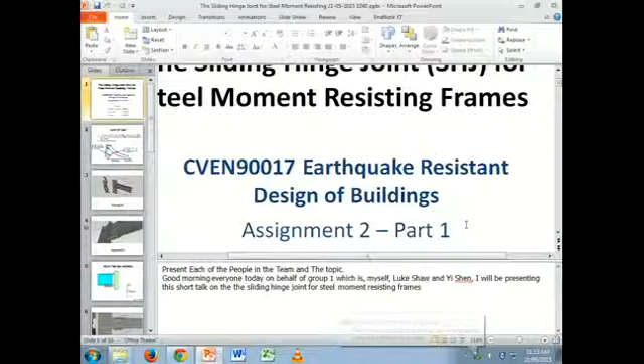We're group one. Okay, so we are going to be boring and just go through in order.

Good morning, everyone. My name is Cameron Stewart, and I'm representing Group 1, which is presenting the sliding hinge joint for steel moment-resisting frames. Group 1 is myself, Luke Shaw, and Yi Shen in the audience there.

First of all, the aim of the sliding hinge joint is to provide a joint that has two different types of behaviors depending on the seismic demand on the structure. You can see here in the ADRS diagram, up to the design level earthquake, the structure is designed to behave rigidly, so for a service level event or wind loading and stuff like that, the structure remains rigid.

Once we exceed the design level event, the joint's designed to behave flexibly, allowing the structure to displace without an increase in the moments and forces induced in the structure. So here's the joint.

The dimensions that we show here are based on experiments in the literature. That's where we got the section sizes from, the bolt numbers, the plates, and stuff like that. So this view shows the assembly of the joint from below.

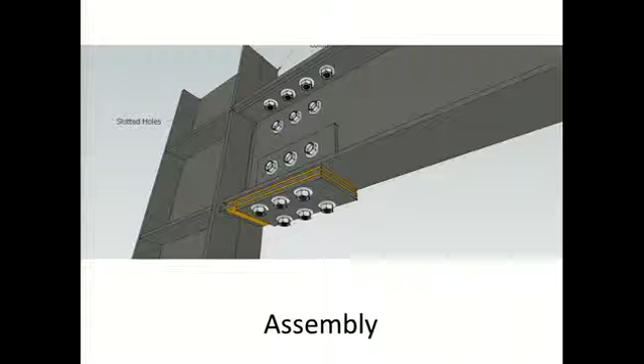Going back, the bolts installed here are installed friction tight, so they're tensioned up to provide a clamping force on these plates here, and that's what creates the friction at the base of the joint, which basically determines the rotational stiffness of the joint. You can change the tension, number of bolts, the interface materials to vary the friction force that the joint needs to overcome to rotate.

Moving a bit further, taking away the beam, you can see that the joint's quite simple. It's only 3 plates with elongated holes, excluding the other parts of the mechanism, which makes it quite cost effective, because fabricating this as opposed to fabricating a normal moment resisting frame joint is pretty much the same amount of work, so it's favourable in that regard.

This animation shows how the joint deforms and develops the hysteresis. Rotations occur primarily around the top flange plate here. As rotation occurs, we overcome the friction force that's being resisted in that bottom sandwich of plates, and that's what allows the hysteresis to develop in this form over here.

You can see that we are developing some moment, and then we're sliding, so no degradation in strength, but just additional displacement, and then again where the second sliding occurs. These two surfaces may actually be much closer together.

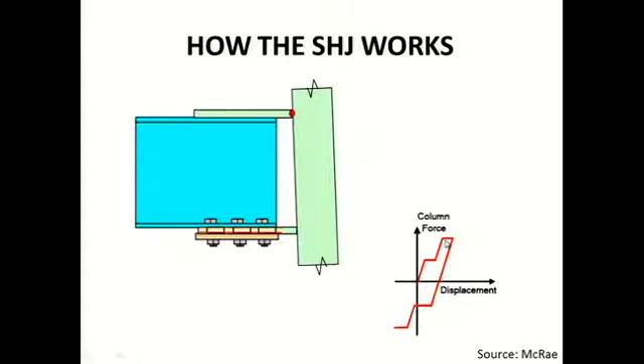As the load's reversed, you can see that the behaviour is the same in the reverse direction as well. And you also note that we've got a rhombus-shaped hysteresis, which is typical of a friction slider dissipation mechanism.

Okay, some advantages and disadvantages of the joints that we found in the research, noted in preparation for this presentation.

An advantage, which is one of the main aims of the joint, is to decouple the frame strength and stiffness, so the two things are independent.

The next one is the lower principal structural cost. Because the joint is rotating before that moment is developed, compared to a typical moment resisting frame, the section does not need to resist such high moments, so the sections can be reduced, and that cost saving can be passed on into the actual joint itself or other damage resisting technologies in the building.

Another advantage of this joint over some other low damage technologies is the inelastic demand is confined within the bolts. Some other technologies may have a fuse or something meant to yield and be replaced post-earthquake. In the case of this joint, that's the bolts, which are a relatively low unit cost item and a lot less difficult to replace than maybe a member or some other component.

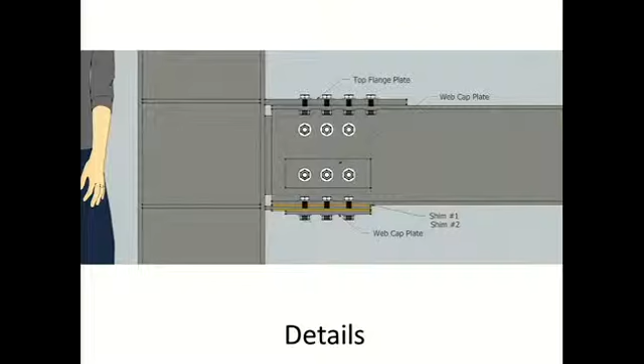Another advantage of this joint, as opposed to a normal moment-resisting frame, as I said before, is the rotation is principally around the top flange. That means the strains induced in the slab are minimal, as opposed to a moment-resisting frame, which would have much higher strains in the concrete, cracks in the concrete, damaging the slab, which obviously increases the cost of rectification works.

Just onto some of the disadvantages. One of the disadvantages highlighted in the literature is the residual drifts. As it's a sliding mechanism, the load may decrease when the building's drifted, and the friction will prevent the building from correcting itself. That's one of the issues there, but that's typical with friction sliding mechanisms.

Another disadvantage is low and varied residual joint strength. As the joint deforms, the bolts have moment, axial, and shear forces in them, and that deforms the bolts and results in a loss of tension within them, which reduces the friction between the plates, so the stiffness of the joint post design level event is not the same as it was in the service level event condition.

Another disadvantage listed in the literature, due to the limit of research, is that up to date the design of this joint is only considered in a one-way moment-resisting frame.

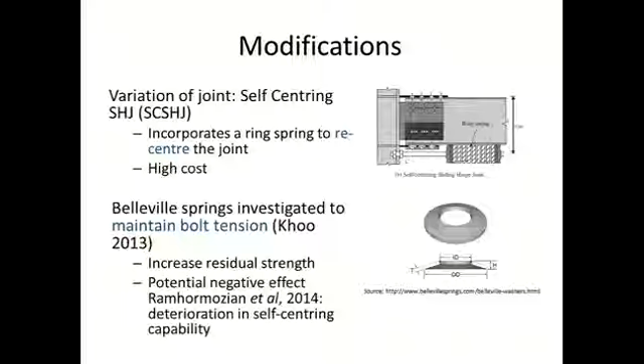So in conclusion, recommendations: based on our limited research leading up to this presentation, we found there were a number of questions regarding the joint, a few that I wasn't able to list due to the time limits we've got here. But we think there needs to be a lot more investigation to really nail down some of those issues before it's implemented more widely in moment-resisting frames.

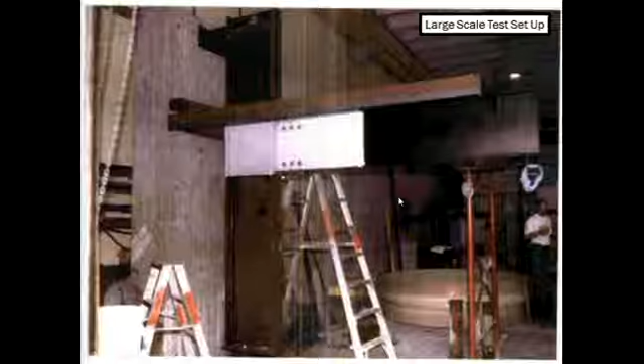This will be a very brief summary because the document related to this is over 100 pages long and I only just skimmed it. As part of Clifton's research, he performed 4 large-scale tests. You can see this very quality picture here that I managed to source from his PhD scan, where he mocked up 4 large-scale real-life tests to nut out the design procedure quirks and the things he really had to take into account in forming this.

This is just a picture of the large-scale test that was performed. You can see the slab, the other side of the hinge here, and this is the instrumentation used in actually going through the analysis of the sliding hinge joint. You can see the sliding hinge mechanism at the top and bottom here. This is instrumentation used to record the data, and you can see this is a stiffened column, because you do usually want a stiff column when dealing with this kind of stuff.

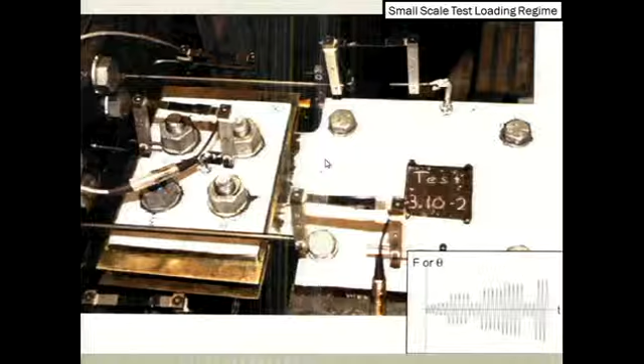There was also small-scale dynamic and static testing, part of this where they had force rotations applied over a time scale just to really get the nitty-gritty details out on individual bolt performance, as part of making sure that what he was proposing wasn't going to kill people if implemented in real life.

These are the sequence of design actions that came about as a result of all of this research, proposed as part of his PhD. There's 14 steps in the basic design of a sliding hinge joint. I guess this would be the key bit of research towards implementation of the sliding hinge joint — being actually able to design this stuff in real life. My inner bogan slips out for a minute there.

The next bit of research is the effect of the shim material. As you also saw on Cam's slide, the plate of material that actually forms the frictional surface — the primary mechanism by way of energy dissipation through the surface — is called the shim. In Clifton's initial research, the first instance of this technology, he used brass.

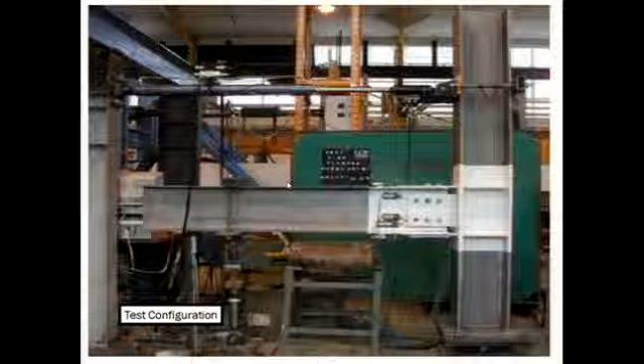But brass isn't always the most cost-effective choice to use — it can be a bit expensive relative to other materials such as steel. So what was done by MacRae and others is they tested out the shim material based on a real-life situation, a full-scale simulation of a sliding hinge joint in real life.

You can see it all happening around here. So what they did is they used different shims in this little section. They tested brass, steel, and aluminium to see which one would perform better. Because if steel works better, that's fantastic, or if steel works along the same lines as brass, that means it's cheaper and has similar corrosive behaviour to the rest of your frame. It really works out nicely.

So they ran these tests and got some test results out of here. This is just a closer view of the test configuration that was performed.

So they got their test results, and what they found is that the mild steel they tested had behaviour congruent to brass. The benefit of that towards the actual implementation of the research is that steel has its own intrinsic benefits. Its cost is a lot cheaper than brass, it's more available, and it's easier to install, as well as having similar corrosive behaviour to its surrounding parts. So if you've got your beam and column all steel, and you have a steel shim in there, it's going to have similar corrosive behaviour, which is really nice when you're doing your corrosive analysis.

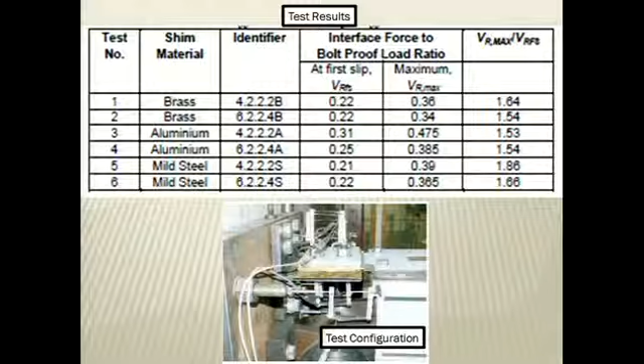Aluminium, whilst having a greater initial frictional resistance, over time as it slid actually lost that frictional resistance. So that was an issue with using aluminium, and why they decided not to go with it for real-life applications. This next bit is just a column hysteresis that was formed as a result of this.

So the testing for this was based on a real-life application of the technology. This is actually a mock-up of Te Puni Village, the student accommodation buildings, which I'll get to in a minute. So this is based on a real-life scenario, just to see if they can improve the behaviour of something equivalent to this real-life application.

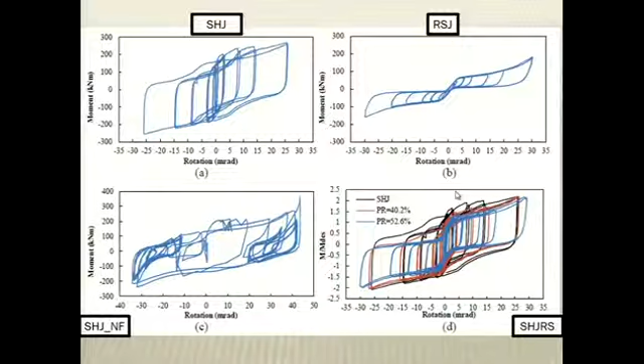Moving on to the actual real-life applications of this technology is the Bellagio apartment building. This is the first implementation of this sliding hinge joint in real life. They used 200 in the construction of this building in the one-way frame. There's not too much documentation regarding it, so I couldn't get any open plan views of this.

So this is more or less a casebook study. This is just the SHJ detailing regarding this - a textbook case study. There hasn't really been too much beyond it because they are still working out the nitty-gritty details of how to apply this in a wider range of scenarios.

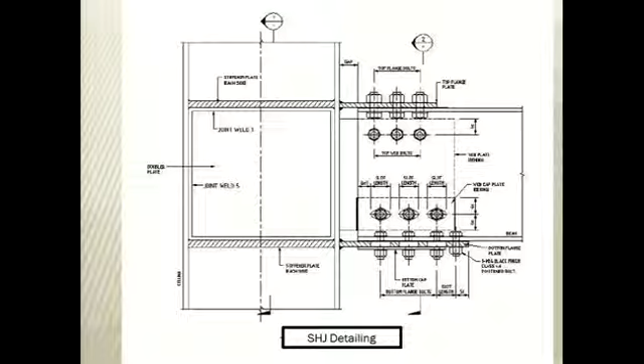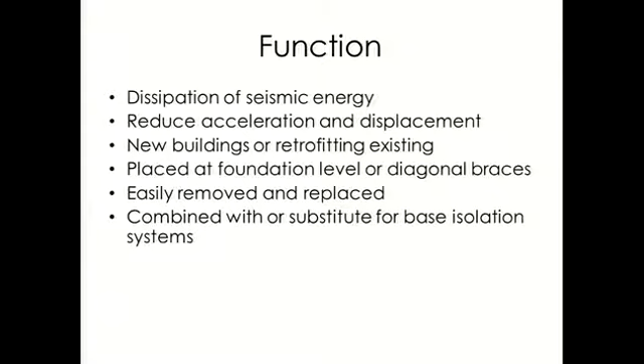Especially with tall buildings where you can't do base isolation, these can act as a substitute. There are 3 broad categories I want to look at today, but the main aim of all 3 is basically to convert earthquake energy into heat.

The first kind is a viscous damper, which is basically just movement of a fluid within a cylinder. It's a cylinder with a viscous fluid in it, with a piston that has some holes in it. So when a force is applied, the viscous fluid can push through the piston and slow it down.

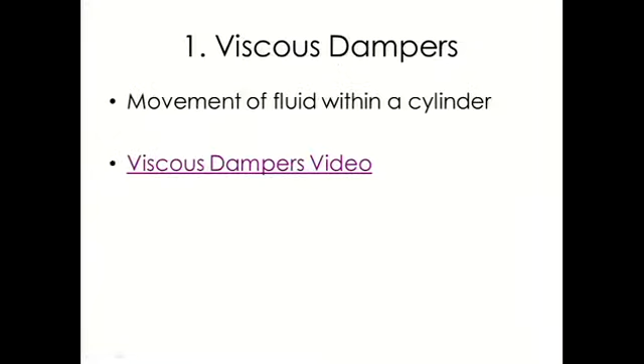The advantages of the viscous damper are that they significantly decrease structural response, and they have better performance in reducing base shear than some of the other technologies I'm going to look at. The disadvantages are that it's pretty expensive and sensitive to temperature. The last one is that the resisting force depends on the velocity - if the peak structural response occurs early in an excitation, the velocity won't be high enough for the damper to actually work effectively, because damping is dependent upon velocity.

The second type I'm looking at is friction dampers. This is literally just 2 bolted metal surfaces rubbing together, so the friction between them is effectively what creates the damping. It's used in a wide variety of different types of structures: low damage steel, timber structures, resisting frames, and diagonal braces. I got another quick video of how it works.

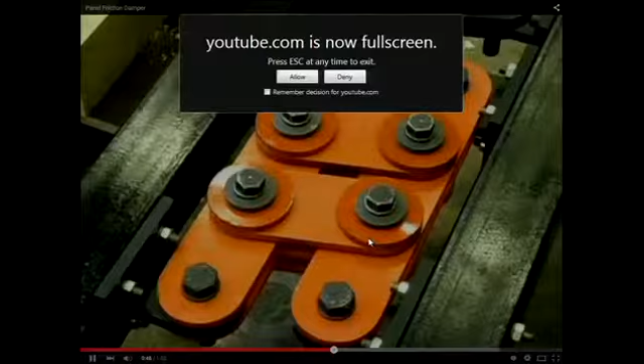It's pretty cool - it's literally just a bunch of metal plates bolted together. So as a lateral force is applied, these metal plates, the friction just causes the damping.

The advantages are that it's reliable and insensitive to temperature as well. It's simple, foolproof construction - as you just saw, you could just bolt 2 metal plates together. For that reason, it's not expensive, and it doesn't require repair or replacement after an earthquake.

The disadvantages are durability concerns - obviously you've got two bits of metal rubbing together, so over time that causes issues like wear and tear. For that reason, it's only recommended for dry internal use, but I'm pretty sure I read in the readings that in New Zealand they're trying to get it to work everywhere, so I don't know. It's only used to prevent elastic deformation at the moment as well.

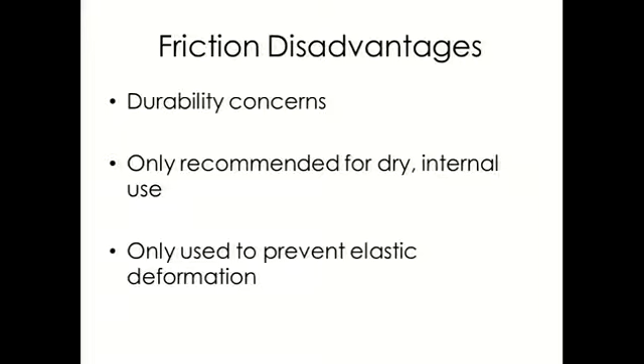The third type is the yielding damper. This is basically just a bit of steel acting as a diagonal brace, which is designed to yield and plastically deform if an earthquake were to occur. The main type is a buckling restrained brace, which is basically an encased steel core, and the case is there to prevent buckling. I've got a picture of it here.

It's literally just this steel core that could replace a diagonal brace in a building, and it's encased, and basically if an earthquake hits, it's designed to yield.

The advantages are that it can be put on new buildings or retrofitted because it's literally just a bit of steel. These are suitable for inelastic deformation, unlike the other ones I talked about, and it's got long-term reliability and insensitivity to temperature as well.

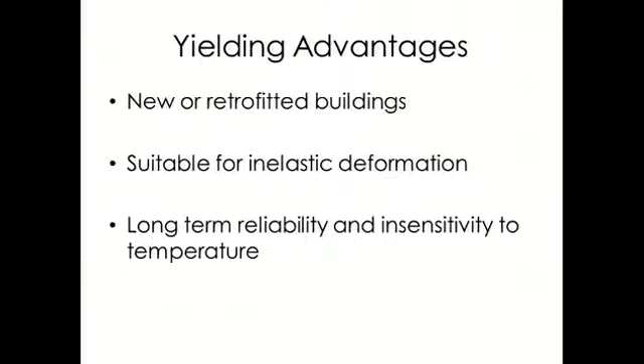The disadvantages are that it has to be replaced after a disturbance because you're plastically deforming it. It may fracture prematurely due to frequent wind loading - that was pretty interesting, so if a building was just being hit regularly by frequent strong wind, it could sort of activate the deformation of these. So they require regular inspection. The last one is that it's not optimal yet due to its strong nonlinear behavior, but I'm pretty sure there are works going on to fix that at the moment.

That's all. Thank you.

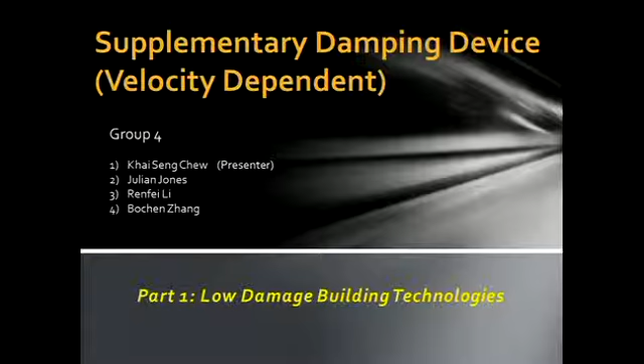Today I'll be giving you 3 examples of buildings which use supplementary damping devices. Before I begin, I'd like to give an overview of what I'll be presenting, starting with a rough idea of where these buildings are before going into detail.

We have 2 buildings located in California: the Arrowhead Regional Medical Center and the Hotel Woodland. Both are located near the San Andreas Fault, which runs for about 1,000 kilometers. Our third building is located in the Philippines, the St. Francis Shangri-La Place, a high-rise residential area also located near a fault zone.

The first building is the Arrowhead Regional Medical Center. It consists of 6 interconnected buildings, 8 kilometers from the San Andreas Fault. Because of its location, it experiences a site transient velocity of 1.5 meters per second. Originally these buildings were designed on base isolation bearings, but the technology at that time could not meet the deflection requirement for such a site transient movement of 1.5 meters.

So they needed something implemented into the current design. What they did was implement what was called the viscous damping device, installed horizontally, connecting the foundation of the building to either a truss or a column. By installing this, they were able to reduce the displacement requirement of the bearings to only 0.6.

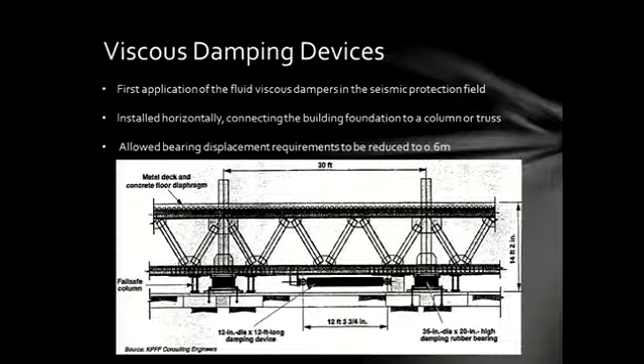Our second building is the Hotel Woodland in California, a 4-story building. The ground floor is used for commercial purposes and the others for residential. It's also worth noting that it is a historical landmark, so when coming up with a design to improve its seismic resistance, they had to cater for designs which do not affect its appearance. It's located in an area of high seismicity near the San Andreas Fault; the largest earthquake to influence the site was of a Richter magnitude scale of 6.75.

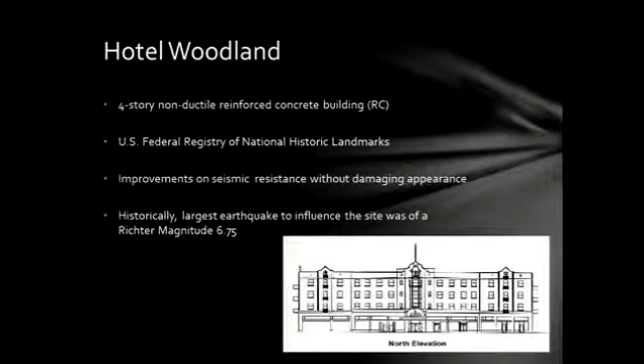What they came up with is a design using a steel moment frame with fluid viscous dampers attached on top. Why this design? The main reason is that compared to other designs like shear walls, it does not affect the appearance of the building. Secondly, it's easy to retrofit this device into the building without causing interference to residents staying there. Another main reason is that it's able to dissipate large seismic energy into heat and reduce inter-story drift, and it was a very reliable device because it was previously used for military applications before being brought into structural application for seismic resistance.

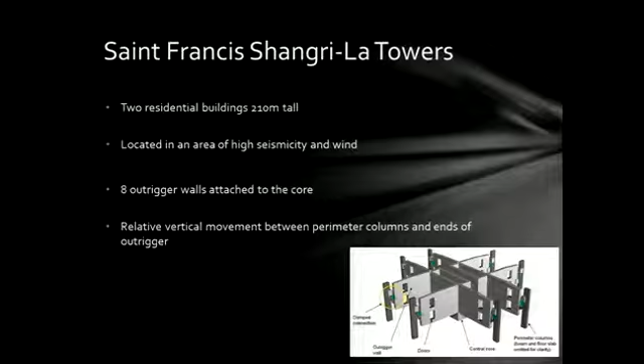Our final example is in the Philippines. It consists of 2 towers, a residential building about 210 meters tall, located in an area of high winds and seismicity. Its structure consists of 8 outrigger walls connected to the cores. Because of lateral movement, this induces relative vertical movement in the outrigger and the perimeter column, as you can see from the picture. They needed to reduce this displacement or any vertical deflection between these structures.

So they implemented, again, the viscous damper. You'll notice all of the examples I have are buildings which use viscous dampers because these dampers are velocity dependent. The reason they use these dampers for this building is because it takes less space and is placed away from the top of the building, which for a high-rise structure is the most valuable space. It can also be used over a whole range of amplitudes.

Here's a clearer picture of the damping device. As you can see, it's connected to the perimeter column and the outrigger walls.

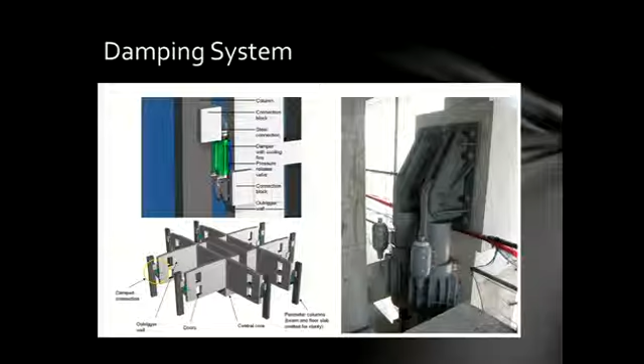I'd like to conclude by giving the reasons why these devices are used in buildings. First, it is very reliable given its track record in military applications. It is also cost-effective for some buildings because it can be easily installed and retrofitted. And it takes up less space, but most importantly, it's able to dissipate a large amount of seismic energy. That's the end of my presentation.

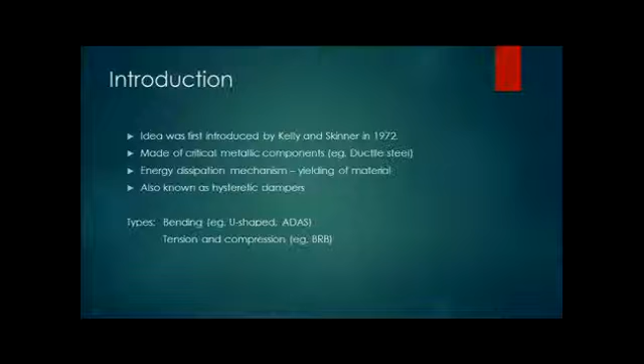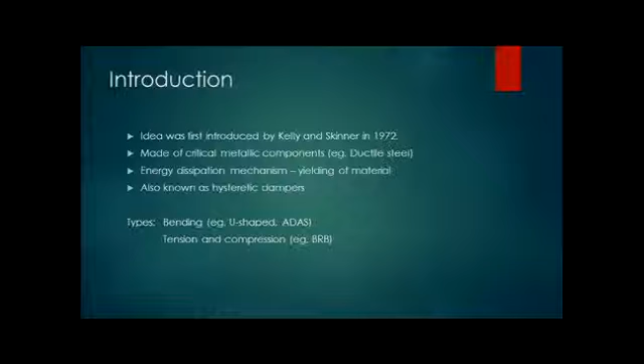As the name suggests, it dissipates energy through yielding of a metal. It's also known as a hysteretic damper because of the nature in which it dampens out the energy. There are two broad classes of metallic dampers: one caused by flexural deformation, where the metal yields through bending, and the other through tension and compression, where the metal yields through tension or compression.

Since a certain part has already yielded, the next time the cycle continues, it goes up and then down, forming a hysteretic damping behavior. An important point is that the yielding is spread over the entire length of the component, so the danger of low cycle fatigue is limited because the strain is spread over the entire component.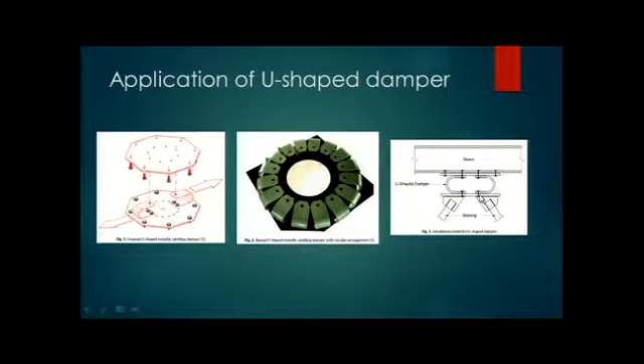This one Alex has already introduced - it's the buckling restrained bracing. It's obviously a bracing, and the way they restrain it from buckling is by introducing a steel jacket. So this is your steel core inside, with a steel jacket on the outside, and then a core.

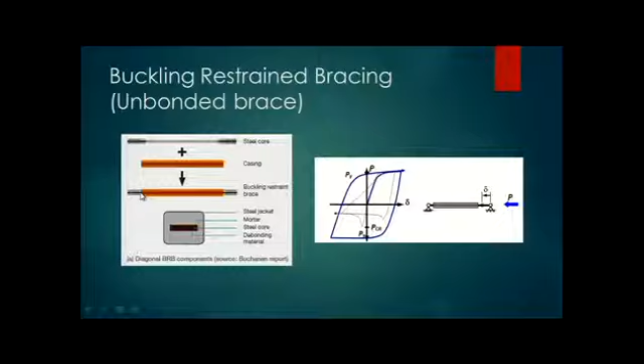Again, in this case, low cycle fatigue is not that much of a concern because the strains are spread along the entire length of the bracing.

Advantages of these dampers: stable hysteretic behavior which is predictable, good for tall buildings because you can retrofit along the entire length of the building. The good thing is it reduces interstory drift along the entire height of the building, so it's not a concentrated damping device like base isolation or tuned mass dampers located at one end. It progressively dampens the energy out.

Also, it has long-term reliability. It's just a material you're putting into a structure. It's insensitive to ambient temperature, and we're using ductile steel, something engineers are already familiar with. Even after it has yielded, it doesn't affect the gravity resistance system as much.

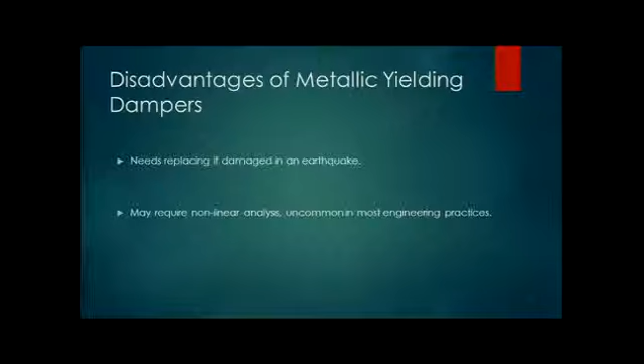The disadvantages are that after an earthquake it has yielded, so it needs to be replaced. You need your procurement system in place to get this done before the next aftershock or whenever the next earthquake is. And since it's yielding, it's non-linear behavior, so to know the exact behavior of your building you'd need to conduct non-linear analysis, which isn't very common in practice.

And that's it. Thank you very much.

Morning, fellow classmates. I'm about to deliver a short presentation on the applications of metallic yielding dampers in structures.

Our first example is the Izazaga building in Mexico City, Mexico. This structure was built in 1970, before they had any idea of how to provide seismic restrictions to a building. It's 12 stories high, reinforced concrete moment frame construction, with a floor area of about 1,200 square metres.

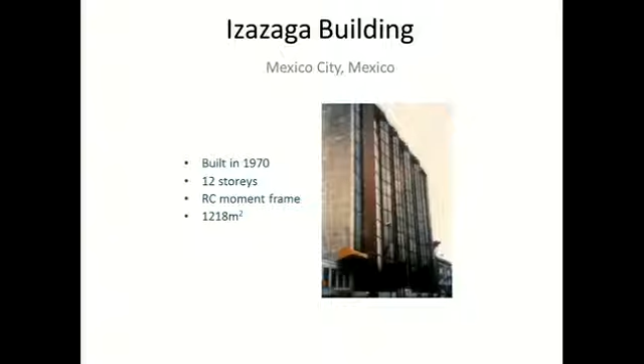What they did to repair the damage immediately was implement small interior columns. This was a quick fix type thing, and it didn't really work, because in 1986, when another earthquake hit, it got damaged even more, and where there were brick infills in some of the frames, those began to crack, so the building wasn't in great shape.

At this stage they decided to do a feasibility study into introducing ADAS dampers into the system. This was done in accordance with the 1987 Mexico City Building Code. After extensive analysis using time history, with earthquakes synthetically made using the standard building codes for Mexico City, the dampers were put in, in 1990.

On the right there's an image of the west wall showing the arrangement of the dampers within the frames up the height of the building. In the lower floors, where the force is sometimes larger, there are two dampers placed concentrically on the beam above, whereas in the upper floors there's just a single damper placed eccentrically in the beam.

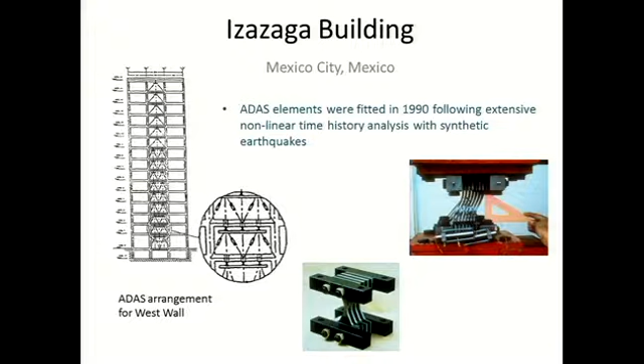The result of this implementation was that the interstory drift was reduced by 40% and the fundamental period by 20%. By decreasing the period, you actually increase the accelerations in the building, but this was offset by the fact that the stiffness of the building is increased by the addition of these dampers.

The main issue with implementing a new seismic retrofit for this building was that it had to be done without disrupting all the occupants of the building so that they could get on with their lives.

So they thought the ADAS is a simple solution which you can just put in with the existing brace system around the building. They placed the ADAS dampers on the perimeter of the building because this also provides additional torsional restraint, which is quite damaging in earthquakes. The further the ADAS damper is placed from the centre of stiffness, the more torsional resistance you get. That is why they did that.

So we're going to stay within the same continent now and go to the USA, looking at the Wallace F. Bennett Federal Building in Salt Lake City.

This one was built in 1960, also previous to a lot of the seismic knowledge that we're privy to now. It's a smaller structure in terms of height, only 8 stories, also a reinforced concrete moment frame, but with a larger floor area, approximately 27,000 square metres.

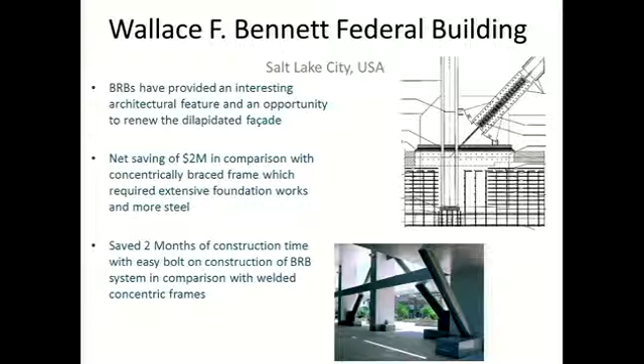It also greatly improved the facade of the building, which was a very bland concrete facade, with interesting architectural aspects happening in the main foyer. This is an inspirational photo of the before and after shot.

It hasn't really changed that much apart from the colour - it's still a bit of a concrete jungle and monstrosity, but now performs much better seismically.

So these are the references. I don't have any recommended readings like Helen has, but you can find them for yourself. Thanks for listening.

We're talking about the passive damping provided by shape memory alloy today. I realized nobody has given any background information, so I'll talk about this briefly. This low damage building technology is a new technology that has recently appeared. It's a bunch of technologies developed independently over the past few years, but this concept as a whole didn't appear until very recently.

Traditionally, when people talk about earthquake resistance, we think about how to build the building stronger. We want larger elements, a higher grade of concrete, but increasing this building standard also increases our cost. So people are thinking from the other end: how about we just decrease the damage of the building itself? So here comes our new concept of low damage building technology.

This is to restrain the damage level of a building, or limit it to some secondary elements, at a given design seismic grade. In order to achieve this target, we need to consider more about the flexibility and ductility of the building, and also focus on level of safety, stringent performance, and economic consideration, of course.

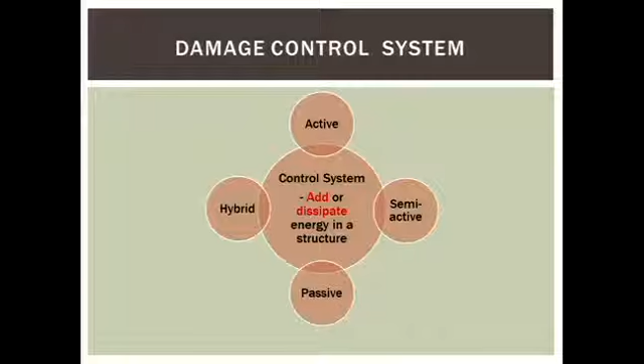For this damage control system, the mechanism is to add or dissipate energy into a structure during an earthquake. If we want to add energy into the system, it's called an active system. If we just want to dissipate the energy from the earthquake, it's passive. There's also something between them, combining these two methods together.

Base isolation system was developed about 80 years ago. It is one of the most widely used technologies of a passive system. This technology isolates the superstructure of a building from the ground so that we could increase the period of the structure, and also dissipate energy because of the deformation of the support itself.

It's like a pile of slices which could slide between each other during an earthquake, allowing for deformation while the energy is absorbed. There's also another new kind of sliding bearing that does not have a rubber part; it just slides to decrease the friction between contact surfaces.

The advantage of such a system is very apparent because it's a passive system, so it requires no external input of energy, which is quite economical.

But because most of them are rubber-based, this material could experience aging under pressure and when exposed to external weather. So it has a very big problem with durability, and under a major earthquake it could just get damaged. So after a major earthquake we have to replace it, which will be a very big problem because you cannot just remove this whole building to the side, replace the support, and then put it back.

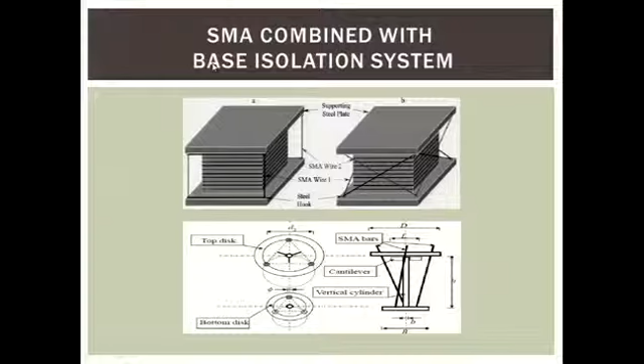This is an innovative system where we get rid of the rubber part totally. This is the aluminum disc on the top and base, and in the middle it's a steel rod. We have 3 of these SMA rods placed at 120 degrees, so they have an even distribution of this constraint force. With this, we don't have to worry about the aging of the rubber material anymore, and we have better use of the deformation capacity of the SMA material.

To solve that problem, it is not often used in isolation. The shape memory alloy is often used as a supplement to an already working system. Another problem is the temperature sensitivity of this material, because as we talked about before, when the temperature changes, the material will endure a phase change. That is why it is not suitable for countries with very low temperatures around 0 degrees.

To solve that problem, we can induce a current within this material so we could heat it up to its optimal temperature. But this will also induce another extra cost for the whole system, so we just go back to the cost problem again.

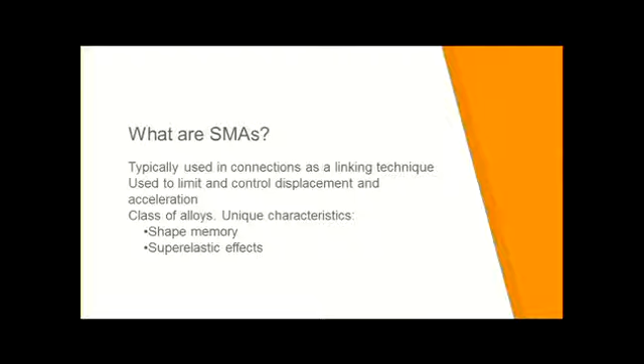Martensite is formed upon loading beyond a certain stress level, which results in that stress plateau as we saw. Upon unloading, the martensite becomes unstable, resulting in transformation back to austenite and recovery of the original undeformed shape.

We primarily looked at some practical examples of these devices. The first I'd like to present is the Basilica of St. Francis of Assisi in Italy. After a 6.1 Richter magnitude earthquake on the 26th of September 1997, large cracks appeared on what was called a tympanum, a structure near the roof at the front of the basilica.

Rectification work included restoring the tympanum using stones from the original quarry, and also installing a connecting device between the roof and the tympanum. This truss was connected using a series of shape memory alloy devices, spaced 50 centimetres apart, so it's actually hidden.

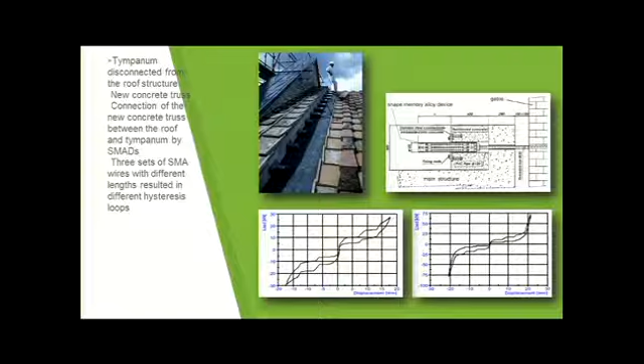So this is the tympanum here, and this is the roof itself. What was found was that a lot of the damage was caused by the oscillation of the tympanum and roof against each other. So this truss structure was put in using shape memory alloy devices to reduce the force transfer.

These shape memory alloy devices allowed, for example, for a low horizontal force seismic event, the shape memory alloy wires to remain stiff and disallow significant horizontal displacements. For high horizontal force seismic events, the wires reduce in stiffness to allow controlled displacement of the masonry walls. And under extremely high horizontal loads, the stiffness increases to prevent collapse of the structure.

Over here we've got two different types of hysteretic loops. The reason for this, through finite element analysis, was that the designers saw a different stress distribution across the tympanum, which resulted in the use of different length wires, requiring different behaviour at different points.

The second example I'd like to go through is the San Giorgio church in Italy as well. After a 4.8 Richter magnitude earthquake on the 15th of October 1996, investigations showed the propagation of significant transverse and through cracks in the masonry infill walls. I'm not sure if that's very clear, but there were large cracks that formed.

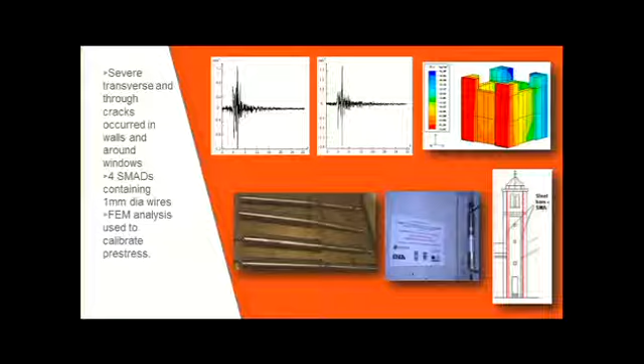These SMA devices were tested with a 4.5 Richter magnitude earthquake, which actually occurred on the 18th of June 2000. An investigation showed that absolutely no damage occurred to the tower.

In conclusion, we found that shape memory alloys are capable of providing constant forces and the ability to dissipate a lot of those strains and return their strain back to the original form. They're particularly useful in the presence of crack propagation, creep deformations, or settlement phenomena. These features, together with their limited encumbrance, make shape memory alloy devices particularly suitable for passive damping and retrofit of cultural heritage buildings.

I've got a quick demonstration of the shape memory alloy wires I'd like to show you. What's happening here is he's lowering the temperature of the actual wire, and then he's going to heat it up just to show the transformation from a position of maximum strain to the original strain.

I can drop it below its transition temperature. Now in its low temperature phase, I can deform it like I did before. I can take it out again, but this time I'm going to try and heat it up quickly, because before it took a while. So obviously there's a lot of energy stored in there, because I put a lot of energy to deform the material into its new phase.

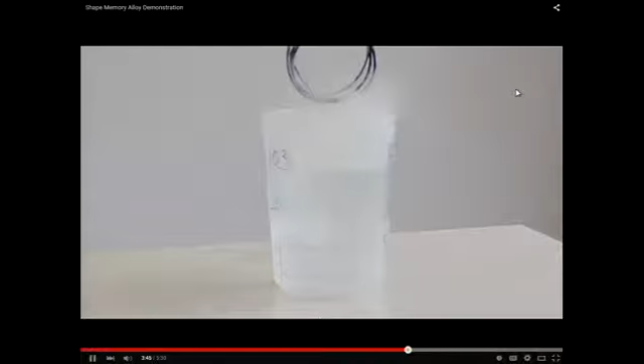There we have it. Didn't quite go according to plan, but never mind. It illustrates the point. There we go. I'll do it again just for the fun of it. You can see I can have endless hours of fun with this. Here we go. 1, 2, 3. Whoa!

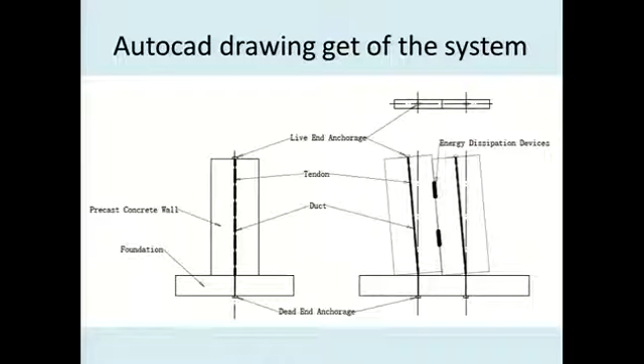Now an important thing to understand is that these strands aren't actually bonded to the inside of the duct. So it's almost like it's a pipe and then the strand goes inside this pipe, if you can visualize that. And so this is just another diagram showing you how the whole system works. It basically rocks because of this strand, and I'll go into more detail shortly. Another diagram where you can see this precast wall with the duct and the tendon inside anchored at this foundation.

Okay, so basically what happens is the building and system is constructed in such a way that extensible connections can form under earthquake loading, and as a result, rocking can ensue. During an earthquake, the building is subject to ground accelerations, which results in the building trying to displace. When the walls displace, these strands that are inside these ducts can tension up. And what happens is that at every level, these strands, and in the beams as well, you get this clamping effect where the strands pull the structure back towards the foundation.

And you'll see this illustrated in a video where basically he explains what I did, but I don't want to waste time. Please do.

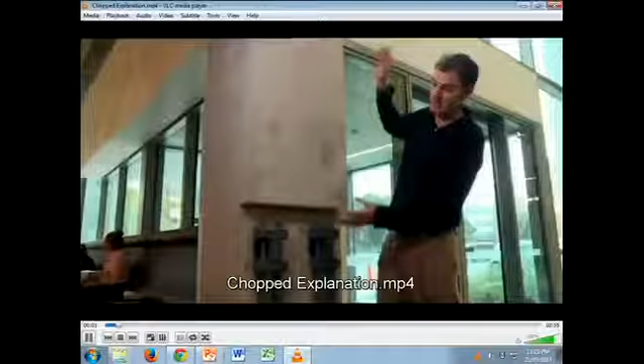So this is the joint between the building up here and the ground. This steel box is on the ground, and this main column, along this joint here, it can rock on the steel box when we have an earthquake. There's a large cable that runs right through the middle of this column and is buried down in the basement. What that means is as the column pulls over, it will then try and straighten the building up so that it always comes back to upright, which is important for people coming in and using the building straight after the earthquake.

So these are the removable dissipators. If there's a large earthquake and they want to be replaced because of the amount of work they've done, you can unbolt these, take them off, put a new one on. Building's as good as new. We did about 4 iterations of this joint to get it looking nice and getting it real simple to build. We went through quite a rigorous procurement process, testing different options in terms of finding the easiest way to assemble it and what the cost benefits were for the external energy dissipation for the client. So really I think the building's turned out very well for everyone.

Basically in this system what you can see is these are the various walls and they're connected by these shear connectors which then essentially undergo some kind of plastic deformation, and so the system can move as a whole together and move in unison.

I guess a key thing to point out, I'll show you this video as well. Not going to work.

This is just a video to show basically how one of these walls actually works together. Not very exciting. No trucks falling like Alex's, unfortunately.

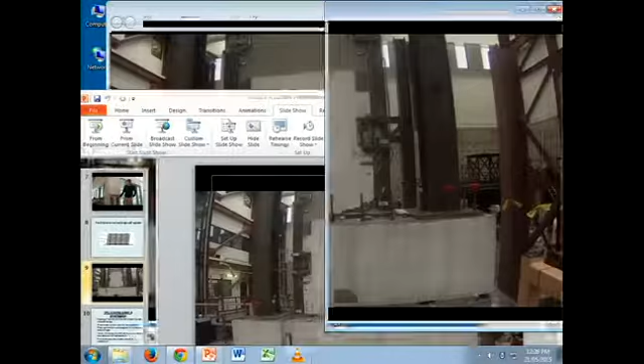Okay, so you're probably wondering, why is this rocking advantageous? Well, basically the rocking mechanism allows the structural damage to be effectively distributed when experiencing an earthquake.

Since the precast elements constitute much of the structure, there are dry connections. You're not just pouring a slab and a column together, they're connected by these strands.

As a result of these dry connections with precast elements on top of one another, what it allows is for you to basically design where you want your plastic hinges to occur. Because these aren't rigid or wet connections, you can have these plastic hinges forming all over the system.

As we've discussed with Helen throughout the semester, what we want is a beam sidesway mechanism, rather than a soft story occurring where all the moments and rotation are about one place. Because all these are precast elements not connected with wet connections, you can get hinges forming at all of these. Rather than the entire rotation being taken up by one floor, the energy dissipated is throughout the whole system, so the rotations at each hinge would be less than if it was just at one or a few.

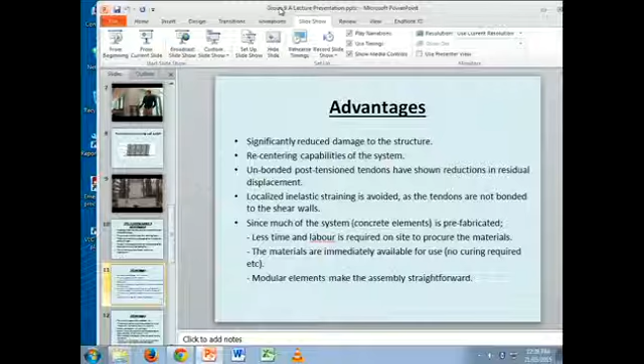Now quickly on to the advantages: significantly reduced damage to the structure itself. Obviously, because the system gets pulled back, it recenters, and this is highly advantageous, because if you have an earthquake and your system's displaced, then what do you do from there? It's a bit of a debacle.

The unbonded post-tension tendons have shown reductions in residual displacement, so the actual displacement of the building itself is reduced. Localized inelastic strain is avoided as the tendons are not bonded to the shear walls.

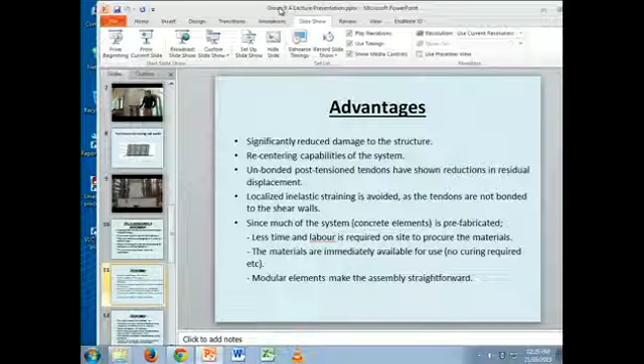Now this is more of a construction benefit, because you're using prefabricated concrete modules. Less time and labour is required on site to procure the materials, and the materials are immediately available for use. So unlike when you pour a concrete slab and have to wait 7 or 28 days for a certain amount of strength to develop, you can use it straight away because it's ready at strength. The modular elements also make assembly straightforward, because it's basically like building a more complicated Lego.

The initial force in the tendons must be selected carefully to ensure that they don't yield at large drift ratios. Since there is anchoring of the tendons to the foundation, it is near impossible to gain access to them, should they need to be replaced. If the tendon goes all the way into the foundation and is anchored, actually accessing it is very difficult.

The system is not common yet, so the contractor undertaking the works will more than likely be unfamiliar with it. Even though historically it's easy to build, people are still unfamiliar with it, so they're still learning on their feet when using this system. Also, long-term durability is a concern for the unbonded tendons.

Those are my references, and Helen looks happy, but I'm a bit worried that she's not so much. Thanks, guys.

Where is it? Which one? Where's it all? Which folder is it in? Sorry? Desktop, is it? Try the documents. Document. CVEN90017. The presentation.

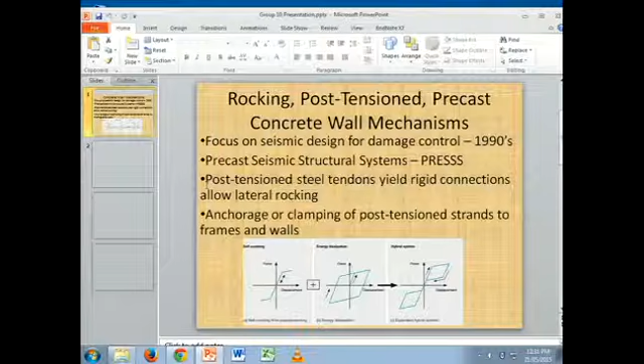Hello, my name's Jared and I'm representing Group 10. I'll take you through some practical real-life examples of rocking post-tension precast concrete wall mechanisms.

Rocking's been built in structures occasionally since ancient Greece, but the focus on seismic design for damage control became popular in the 1990s. Precast seismic structural systems, or PRESSS systems, are a key part of this.

They involve post-tensioning steel tendons that yield at rigid connections to allow lateral rocking, as previously mentioned, and this requires anchorage or clamping of the post-tension strands to the frames and walls. This figure shows how the self-centering of the post-tensioning combined with energy dissipation gives you this flag-shaped hysteretic hybrid system, which is what we're after.

Two recent buildings built with this construction technique are the Alan MacDiarmid Building in Wellington, New Zealand, and the Paramount Building in San Francisco, USA. Those are those two there. They were built and designed successfully, but neither of them have been subjected to earthquake loads yet.

Two that have are the PRESSS 5-storey precast test building built by the University of California, and the Southern Cross Hospital in Christchurch, which was subjected to the two well-documented Christchurch earthquakes. First, we'll look at the University of California test building.

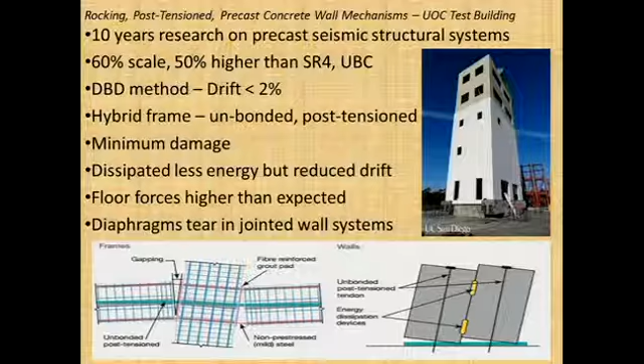No damage from the 4th September 2010, 7.1 magnitude Darfield earthquake was noted, and only minor damage from the 22nd of February 6.3 magnitude Christchurch earthquake was found, even though that earthquake was much closer. Minor crushing was found on the concrete coupled wall interfaces on the south wall side.

Analysing the U-shaped dissipators revealed that the interstory drift was between 0.5 and 0.75%, which is adequate. Allowing this rocking alleviated the need for the development of plastic hinges in the concrete, and this reduced the structural damage to the building greatly.

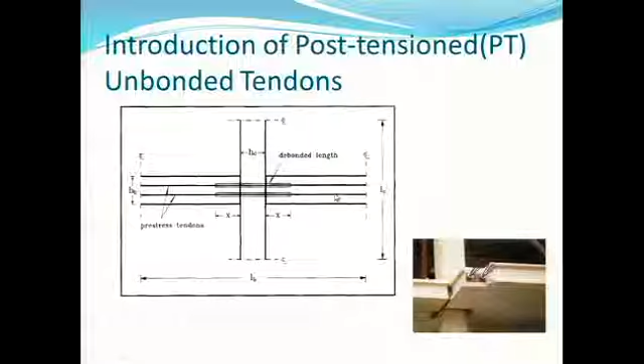If this picture seems too abstract, take it easy and forget it for now, because in the following part I will introduce two basic applications of this technology in the concrete frame, and I hope everyone will have a much better understanding after I finish my presentation.

The first one is a hybrid frame, which combines the PT tendon with rebars, and they work together. The second one is a frame with only the PT tendon to resist earthquake actions.

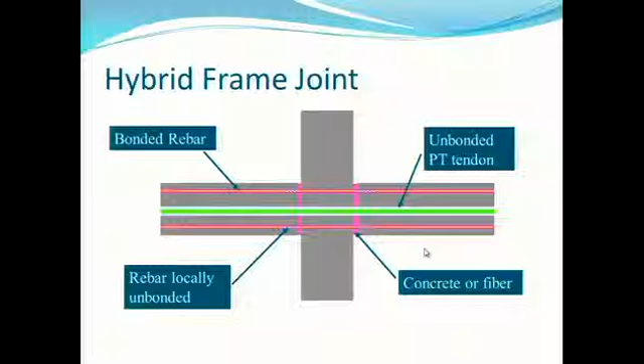If we take a closer look at the joint, we can see here is the unbonded PT tendon, and in a location further from the joint, the rebar is bonded. But close to the joint, it is locally unbonded. For the interface of the column and beam, we use concrete or fiber to fill it.

So when the earthquake occurs, the joint deformation could be like this, and the tendon works, and there also exists a very high compression in the concrete part. These two things prevent the steel from yielding, so all the structural elements remain in elastic stage. So when the earthquake is over, it goes back like this.

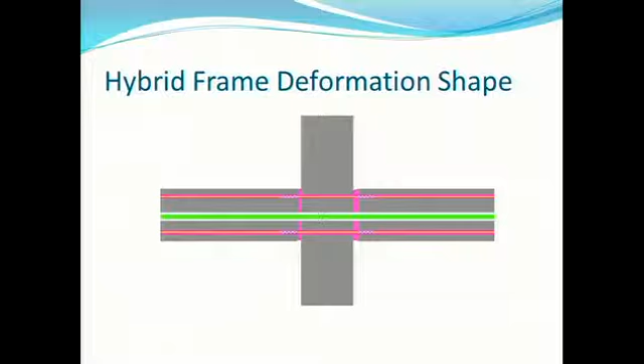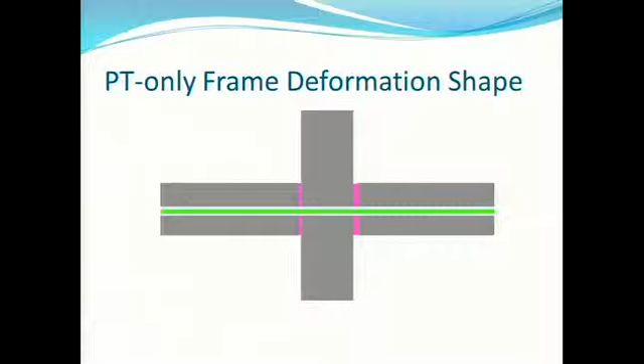For the PT-only frame, it's pretty simple, and it's only got the PT tendon inside without any rebars, and its joint is like this. Because it's got no rebar inside, its joint is too rigid. And its deformation is like this - quite similar, but not as flexural and ductile as the previous one.

I also did the mechanism analysis. As I just mentioned, in this part the concrete is in compression. So during the design, we need to pay extra attention to the concrete strength, and we need to take measures to increase the concrete strength, like using confinement or just increasing the concrete grade.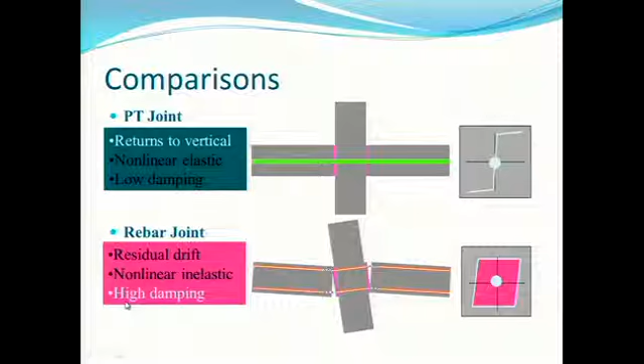I also did some comparisons between the PT joint and the rebar joint. For the PT joint, it always returns to the vertical location, it behaves non-linear elastically, and has a low damping ratio since it's too rigid. For the rebar joint, it always has some remaining displacement after the earthquake, it also behaves non-linear inelastically, but has a very high damping ratio, which means its energy dissipation is much larger than the PT joint.

So for the advantages, we can obviously see there's no or little residual displacement for this building reinforced with PT tendons, and the PT tendons could protect the beam and column by transferring the deformation to the joint, because the joint takes most of the earthquake actions. Since the whole structure is precast, it simplifies the design process and saves construction time.

It also has some disadvantages because the joint is rigid and causes force or stress concentration. So we need to pay extra attention to concrete crushing or shear reinforcement, and it has little energy dissipation without help from the rebars. Therefore, our group suggests that we should use a hybrid frame in real cases in the future. So thank you.

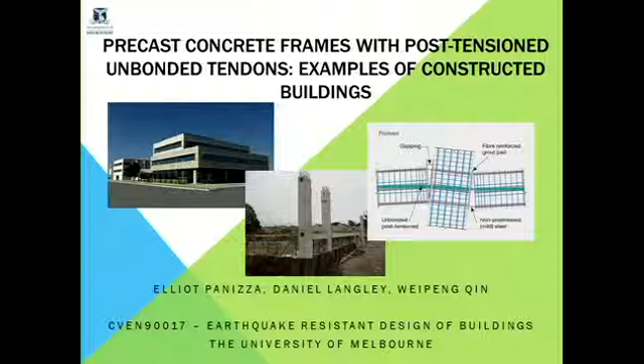So pretty much we're looking at precast concrete frames as well, with the focus on frames rather than walls, like what group 10 had, I think it was. So we're looking at two structures in a bit of detail. The first one is the Alan MacDiarmid building, which was part of one of the universities up in Wellington. The second building is the endoscopy building in the Southern Cross Hospital in Christchurch.

To assess these buildings, we're using the criteria that came out of the Christchurch Royal Commissions, which of course is affordability, durability, ability to self-center, non-structural damage, damage mitigation, and repairability.

So firstly, we're going to look at affordability. Of course, the university building, the Alan MacDiarmid, was $40 million for 6,000 square meters, while the second structure, the Southern Cross Hospital building, was $7.2 million for only about half the square area. Of course, the university building's price includes the research facilities, so it's expected to be much more expensive, and it's in fact estimated that the actual structure itself was about the same as it would have cost if it was a regular reinforced concrete structure.

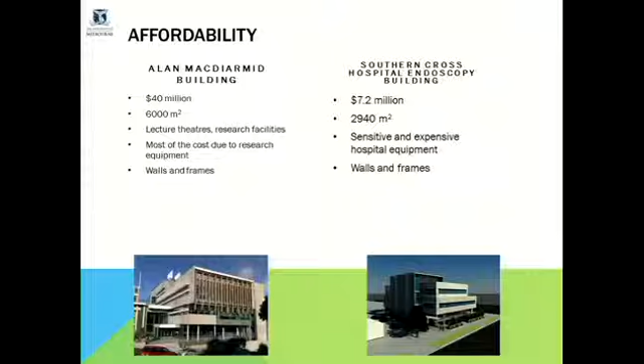Pretty much the reason why this structural system is so cheap is because it's a precast system. You have a little bit of cost added due to the seismic structural system, but also cost savings due to the precast, so you save a lot more time in construction. That, of course, is a huge tick for affordability.

One of the other issues is that you need to make sure the gaps are not filled over the building's lifespan, because in 10 or 20 years a tradesman might come along, see this gap in a beam, and think it's not safe and fill it in. But the gap is really meant to be there to allow this part to rock, to allow the beam and column to bend together, because we don't want that to be a rigid connection. So durability, as long as you take care of it, is another tick.

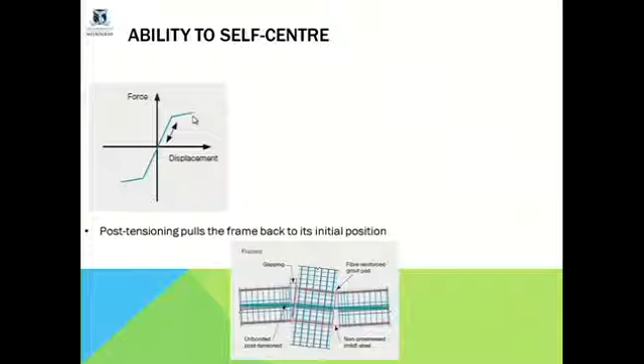Now, the ability to self-center, as already covered by the previous groups, the post-tensioning pretty much pulls the structure back in, because the position with the least energy stored in the post-tensioning is just the vertical position. So the structure might go up, might deform a bit, but then it'll get pulled back down. When you combine that with the hysteretic loop, you have the really nice flag-shaped hysteretic damping system. So that's another huge tick for the ability to self-center.

Now coming on to the non-structural damage. The hospital building, as already said by Group 10, went through the Christchurch earthquake, especially the big aftershock, magnitude 6.3, only 10 kilometers from the CBD. Kind of luckily for us, the structure was only completed a couple of months before the earthquake, so it's really the perfect example to illustrate how the structural system actually works in an earthquake.

So the first thing is we've got to assess the damage of the structure. Because it's a hospital building, a huge issue is the damage that goes on both inside and outside, and there's a lot of sensitive equipment. The fact that the hospital was able to open just the day after the earthquake really shows there was no non-structural damage.

Now, damage mitigation. As previously said, there was a little bit of damage at the interface between the column and the beam, mainly because it rocks back and forth. There's a little bit of spalling, a little bit of cracking. They've tried to prevent this damage with steel armoring, but as you've seen, it hasn't worked 100% of the time.

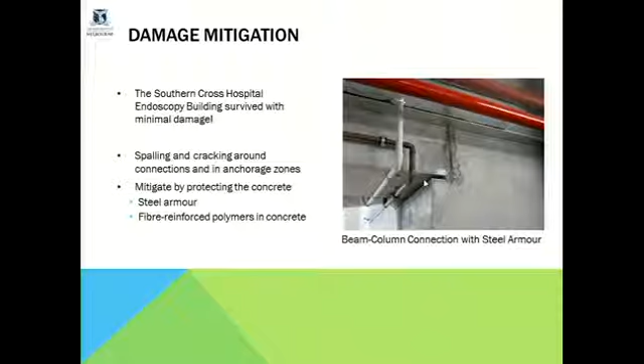So what some researchers are currently doing is looking at fiber-reinforced polymers in concrete to really strengthen up the end zones of the concrete there. So when you have the pounding force, rather than it being brittle and cracking, it's really got something to tie the concrete together a little bit better. So as long as you design for that, damage mitigation is not really a problem.

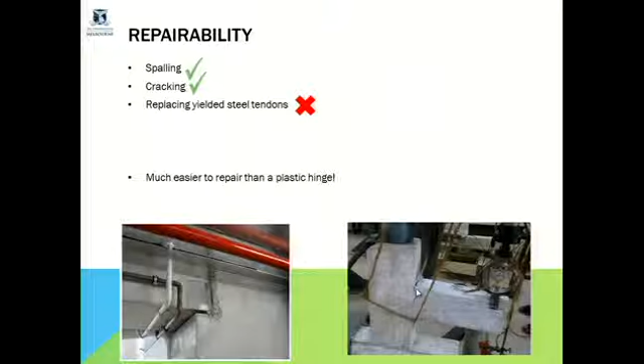Now, repairability. Obviously it's much easier to repair this cracking and spalling rather than a plastic hinge as you would have in a regular reinforced concrete structure. So both cracking and spalling, that's fine. We do have one problem, which is that with the post-tensioned cable inside, it's pretty difficult to replace post-tensioned cables, so that's not really a good thing. But it is much easier to replace a post-tensioned cable than it is to actually replace the reinforcement in a concrete beam. So overall, it's a pretty big tick for repairability.

So in summary, we've gone through affordability, that's fine; durability is good; ability to self-center; non-structural damage; damage mitigation; and repairability. Overall, if you're looking for a structural system, mainly this one is for low-rise structures, and of course structures that you're willing to invest a bit more money in. But overall, yeah, it's a great structural system. So thanks for listening.

Hi, so I'm from group 13, and we're going to talk about the base isolation system.

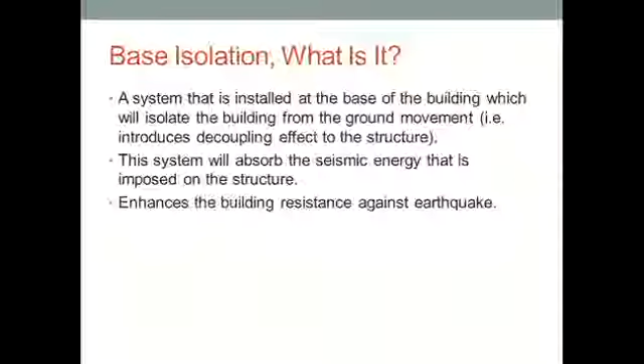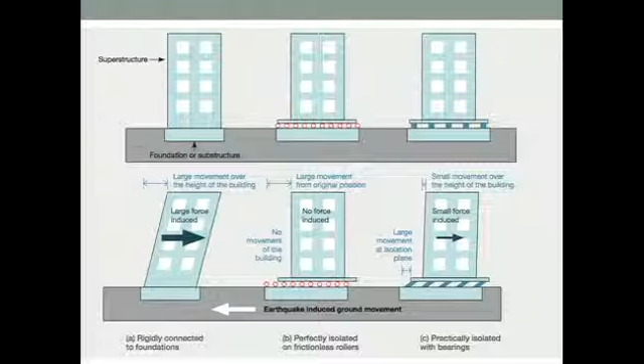So when the earthquake strikes, the building itself will move along with its foundations, so there is no local displacement in the building. But in reality we cannot have this, so what we have instead is the base isolation system, which takes most of the displacement, and the rest, which is very small, is transferred to the building.

Compared to a normal non-isolated building, which is usually assumed to have 5% damping, an isolated building will have 25% damping.

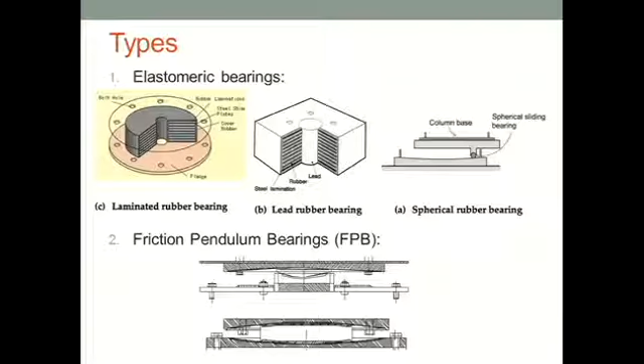These are the types of normal base isolations. One is the elastomeric bearing, which is steel or lead encased with rubber. The other is the friction pendulum bearing, which usually has a larger displacement capacity, up to 1 meter. So what is the advantage of base isolation?

It reduces damage and enhances the structural integrity of the structure. Usually, in general, no maintenance is required throughout the building's life, but when a great earthquake occurs, it usually has to be replaced or maintained.

Base isolation also allows buildings of high importance to continue to operate. This is especially important for buildings such as hospitals and government buildings. It is possible to use this system as a retrofit for existing buildings. Cost-wise, it only adds up to 3% extra to total construction costs.

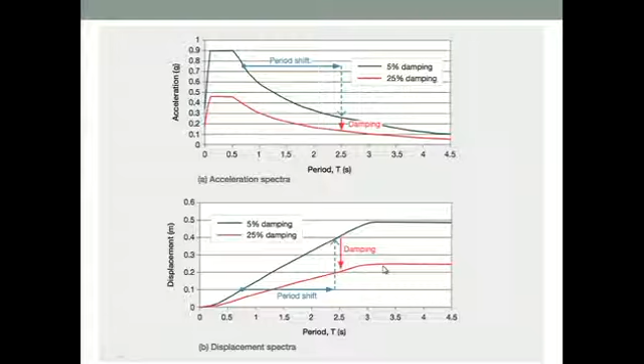The disadvantage of base isolation is that it doesn't work for all types of structures and sites, as soft soil and tall buildings usually have higher natural periods. In these cases, the period shift effect is not very effective. For example, if your period is around 2 seconds and you introduce the period shift, the reduction in acceleration is not significant, and your displacement will be capped at that, in this case around 0.5, so it will not be very effective at all.